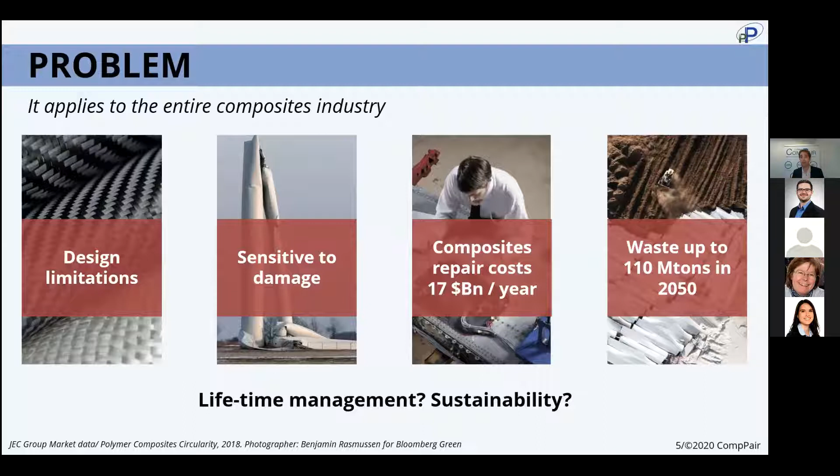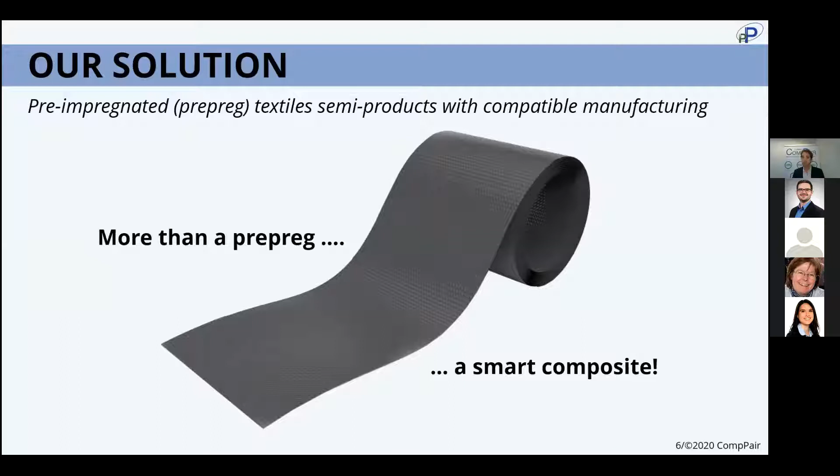What we are bringing as a solution is textiles, carbon and glass textiles that are pre-impregnated with our resin chemistry, and it's more than a prepreg. It leads you to smart composites. So what you will do with those prepregs is first manufacturing them, producing full composite parts with our prepreg products, and what we aim for is to have full compatibility for you on your manufacturing line.

Then, of course, what we are bringing when you produce those composites is a better crack resistance, and you will have the ability to fully regenerate the damage multiple times, and most importantly, extremely fast. At the end of life, and this is why we are providing a 360-degree solution, is an improved recycling.

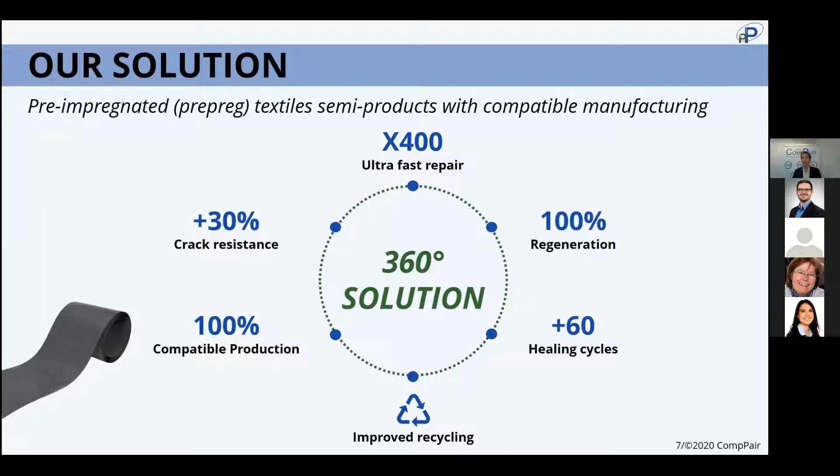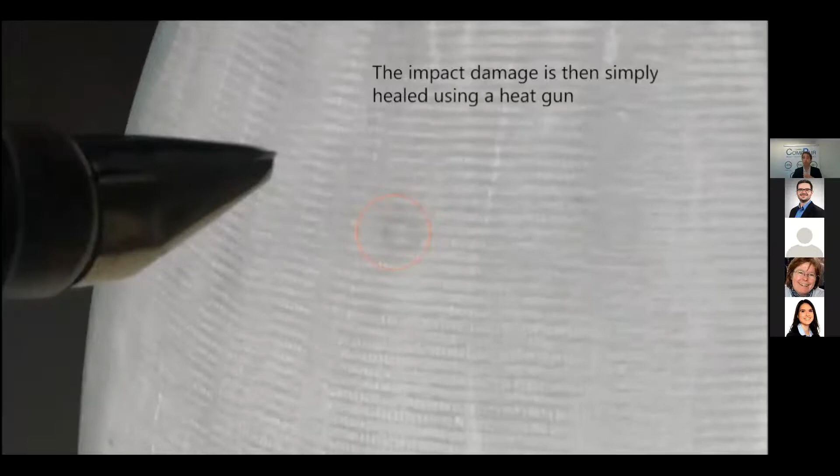To demonstrate such technology, we have run several demonstrations, but specifically that one, which is typical of the aerospace industry. We impacted it, and here you are able to see a typical damage. So for you, this might be critical, and we know that this is critical because it will just grow into a larger damage. And you would normally spend several hours to repair it. With our solution, this is simple, 150 degrees for 1 minute, and it's done. You recover fully the mechanical properties.

With such technology, we are bringing now those prepreg products. This is the first product family that we have, carbon or glass fiber prepregs pre-impregnated with one typical resin chemistry, and here I have an example of those prepregs that are twill or UD glass or carbon textiles. For you, what you have is a standard manufacturing that we are providing with this first family of product of 140 degrees for 3 hours.

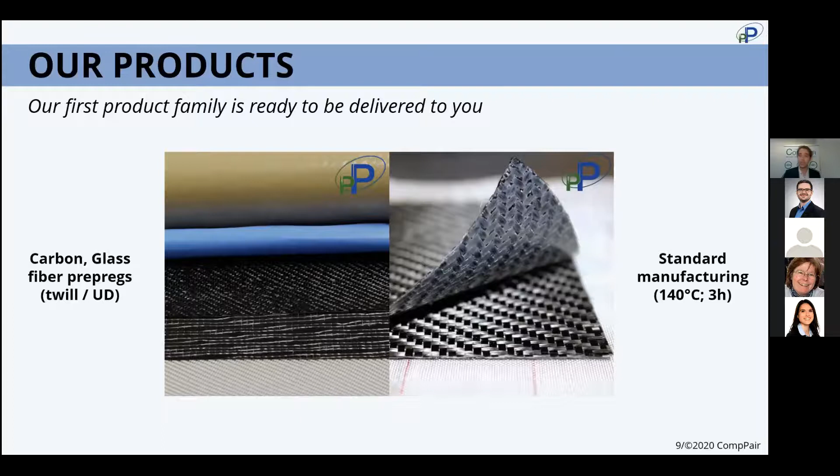So now I think it's time to go for a demonstration to see it directly with your eyes. What we will do for this demonstration is, as a first step, an impact made with a steel pétanque ball, then run the assessment of damage thanks to an NDT machine or visual assessment, and then at the end, the repairing process that takes only 1 minute in our case, and then we will assess how the damage is healed on carbon and glass.

And for that, I will just go to the other camera. So we will shift the camera right now so that you can see the demonstration and Robin running those demonstrations.

Okay, so I have here the glass plate and here the carbon plate. I will impact them, as Amel said, with this steel ball. I have a small plate to protect the floor as well. Let's not waste more. Let's impact.

So normally you will see an impact in this area on this glass plate. I do the same with the carbon plate. I will need just to be a bit more precise this time. And here we go. So I hand the plate to Amel.

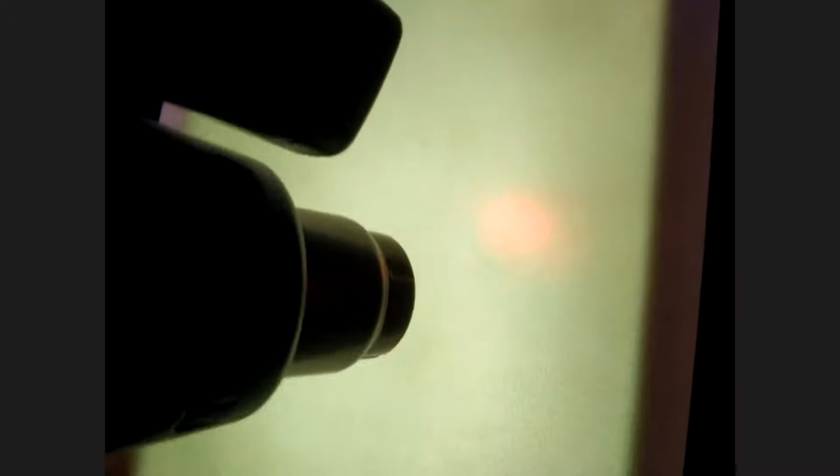And what we will do now is bring a typical heat gun that I have here in my hand that you can just see. And what I will do is come onto the damage. So you see close the damage, and I will run the heat gun here. And with the heat gun, what you will see is typically, in less than 1 minute, the temperature is well reached on the damage.

And when the temperature is reached, what you would see is that the damage has completely disappeared. So I will let you know when the temperature is okay. It's on my screen, it will be green. And we are soon okay. Yes, we are good. So what you see here is that the damage has completely disappeared.

So now we hand back the camera here to Robin to assess the damage on the carbon and to see how it goes with the NDT scan. So I have here the NDT machine provided by Proceq. I have here a probe with 64 elements. I have put a bit of gel on my plate, the same kind of gel you would put for an echography. And basically we are sending ultrasound and recording the signal we get back from the plate.

And it's showing here with this red to blue scale. When it's red, we have a strong signal, and we will lose this signal as we swipe over the defect. So I'm swiping the plate, trying to find the defect. Here, you can see it, I have it here. And yeah, we see that it's time-based, so the screen is shifting.

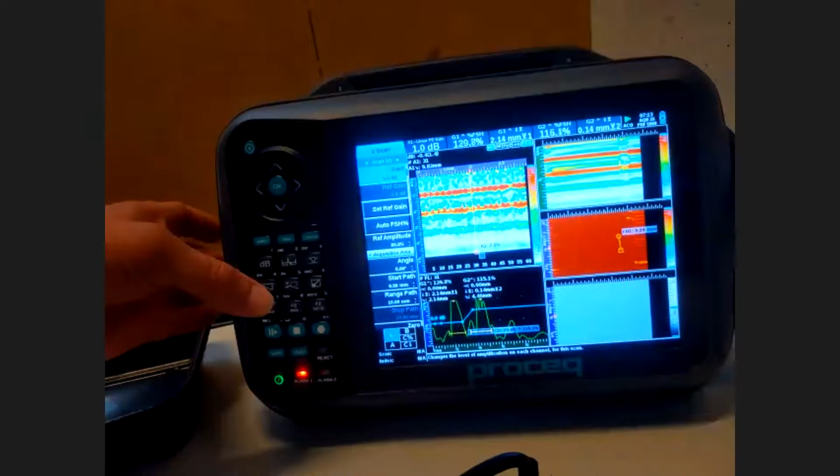What I will do is to record while I swipe over the damage. And this way we will be able to spend a bit more time on it. Okay, now I can save the file. Just need a name, DAM, maybe I can call it this way. You know, it's our damage. I save the file and I reopen the file then.

Okay, and here we have the typical L scan, A scan, B scan, and C scan. We'll go on the C scan view to see a bit better. I will enlarge it like this, and I can also zoom a bit on the defect. You can see that it has the typical shape.

I now select the freehand cursor so we can measure the impact to really assess what is its size. I'm moving the cursor, you can see it here. And as you can see, we are around 15 millimeters of impact. I can give back the plate to Amel so we can clean it before we heat it. Otherwise, we will just dry the gel on it.

And you can really recognize the typical shape we had also with the glass plate. And it's also, as you may notice, quite similar size as we have impacted it in the same way with the same pattern. And now I think that we are almost ready with the plate. It's dry.

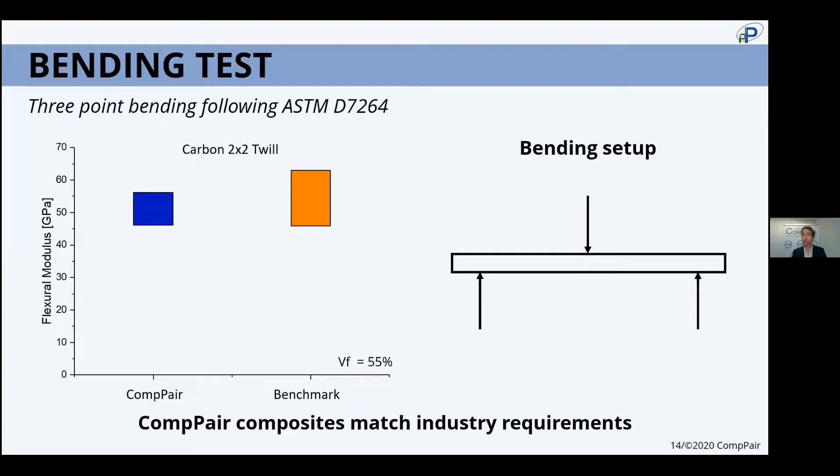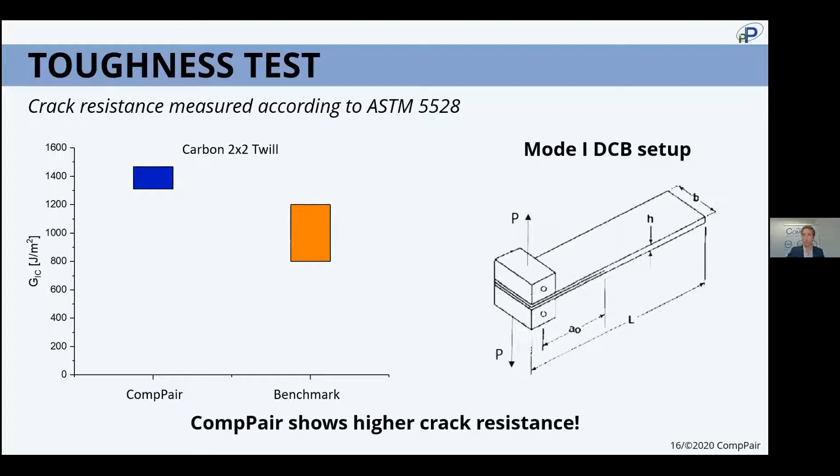We've done exactly the same for bending setup. Here you see the flexural modulus for CompPair composites in comparison to industry benchmarks. And then at the end, what we have said at the beginning is the fact that we have a better crack resistance, so better toughness of those composites. And you see here typical toughness value G1C for, again, CompPair composites higher than the industrial benchmarks that we could find.

Here, what you have seen is a demonstration of static damage and repair of those damages typically after an impact. However, in typical applications, what you would find is fatigue damage, so cracks that are growing over time due to the different stresses that are applied onto those structures. We have done the reproduction of exactly those cases in some tests. And what you see here is a typical modulus on the left for different healing cycles.

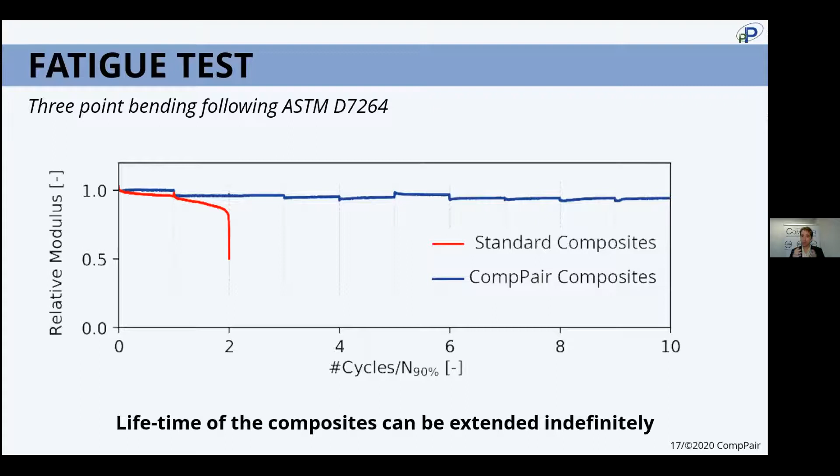And what we have done was to take the sample and do some fatigue testing and then see how they can recover damage after they are damaged at a 90% probability of failure. We stopped the test, we healed the samples, we redid the test again, and what you can see is that for standard composites in red, this is failure after 2 cycles. And for CompPair composites, basically, you can highly extend the lifetime of the composites as compared to standard composites.

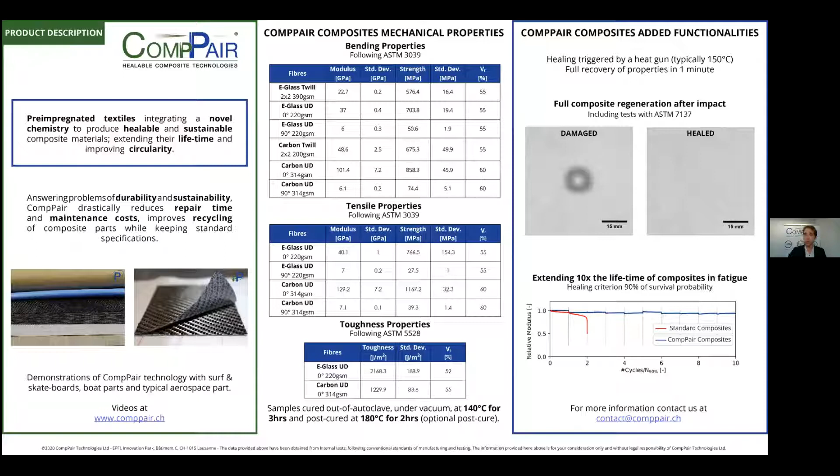To finish this webinar, what we want to do is just tell you a bit about us as well. We are a young company and we just want to share with you our history, but also our vision for the future.

This technology and those new products are based on deep research run at the École Polytechnique Fédérale de Lausanne in Switzerland, and we reached a breakthrough in 2018, then assessed the opportunity and scaled up the product, ran various demonstrators. We validated the market as well early this year, with validation of the product and the properties that you have seen here. And we also got various awards, and especially we just got awarded the Solar Impulse Efficient Solution Label.

We are now here with you with our sales, but in parallel we are also fundraising. We're a young company, and what we want to do is extend the product portfolio to best meet the various application needs that you would have. Most importantly, we are growing a wonderful team right now in a time of crisis, and we really hope that for you as well, it's going well in those difficult times.

We were speaking about the different products and the extension of the product portfolio. We are now bringing a first family of products that is adapted most specifically, of course, to high performance marine and sports applications, but our aim is to grow this product portfolio in order to best meet the various application needs, and we have already started the development. So if you are interested in that, do not hesitate to contact us. We are more than happy to get in touch and have further discussions to assess the different synergies that we could have.

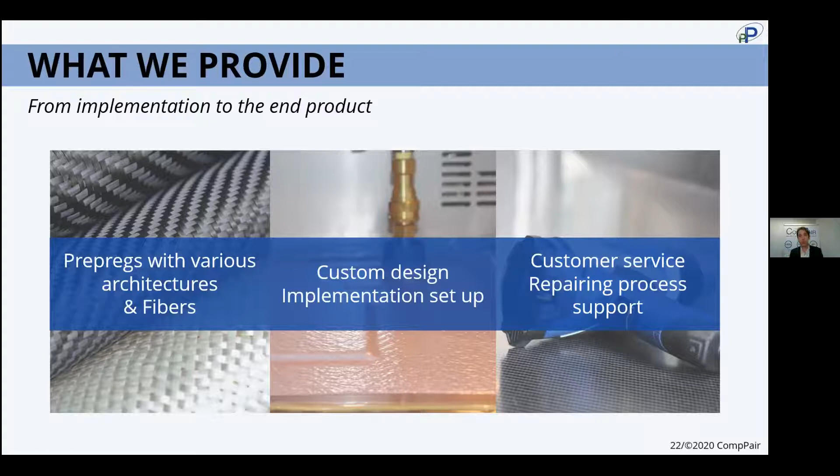Finally, what you would be interested in, I guess, is to know what we provide. We provide things from the implementation to the end product. We provide at first the prepregs with various architectures and fibers, but after that, we are also here with you for custom design, and to contribute to the implementation setup. Then, of course, customer service, but most importantly for such a new product, repairing process support in terms of heating the plate when you need the repair, even if it's really easy, and also assessing the damage with the NDT machine or simply by visual assessment.

With that, of course, we are not just Robin and myself, we are a wonderful team running this venture, with Véronique Michaud, scientific advisor, Cecilia on the technology side, Camille on the business side, and Bertie and Nicolas, whom you might have contact with after this webinar.

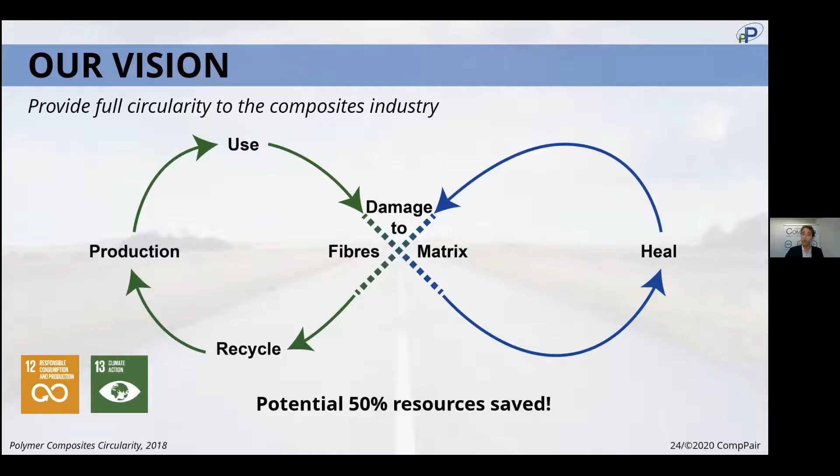I would like to close by sharing our vision, which is really to provide with those solutions full circularity to the composite industry, going from the production and use phase that you are used to, but then you have issues in terms of damage. If damage appears in the matrix, we are able to heal it and reuse the part again. If damage appears in the fibers, we can recycle them and reproduce them, closing the loop. Such a circular economy model has demonstrated the potential to save a huge amount of resources in composites, totally in line with the Sustainable Development Goals. So if maintenance costs are an issue for you, if sustainability is a high concern for you, we really hope that you will join us on this impactful journey.